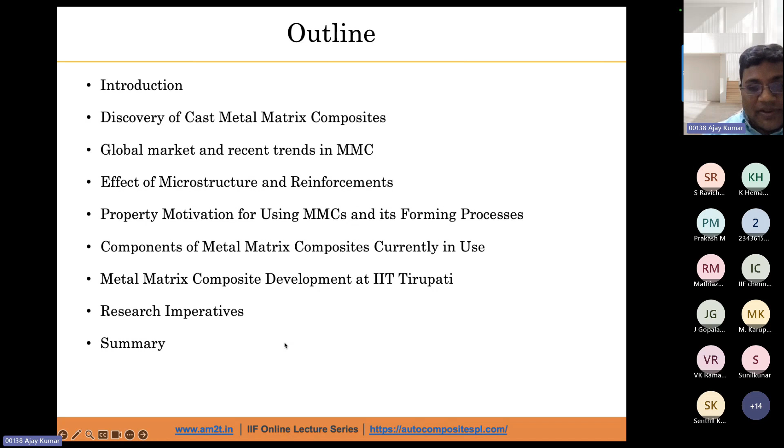The discovery of the first cast MMC, metal matrix composites, happened in 1969, where Professor Pradeep Rohatgi, whom I worked with for almost 3 years, developed the dispersion of graphite particles in the aluminum metal matrix through injection into the melt. This process he developed at MIT, USA.

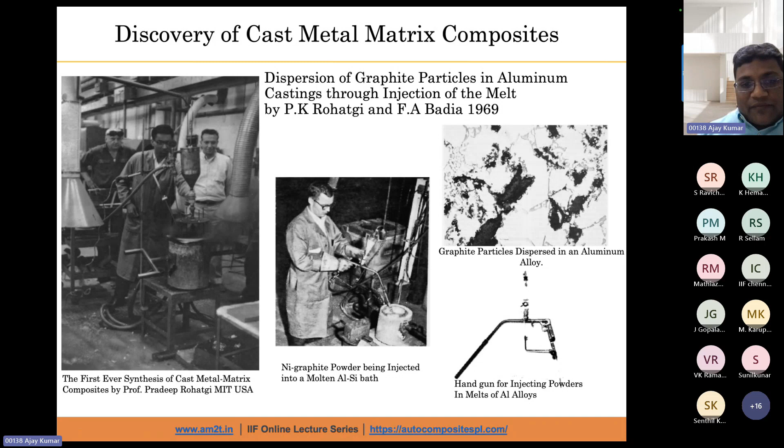You can see here he used a very simple setup for mixing aluminium reinforced with graphite reinforcements, and he got a very beautiful microstructure. You can see the graphite particles embedded in the aluminium alloy. This was the first time Professor Pradeep Rohatgi and Professor Badia at MIT USA developed this material and process. Since then the journey started, and this MMC field has progressed a lot, with many people working on developing different metal matrix composites for various applications.

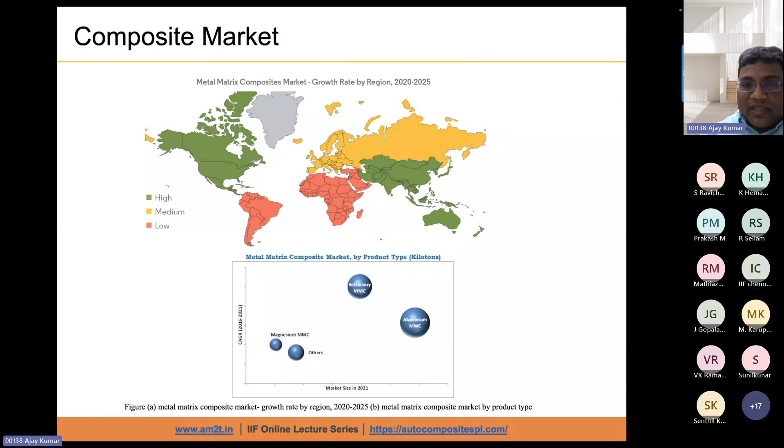When we see the global market of composite materials, most of us are aware of the composite materials of various categories. Here I am talking about metal matrix composites. India is also one of the leaders in developing metal matrix composites. Several institutions in India, especially CSIR labs like CSIR Trivandrum, CSIR Bhopal, and several IIT faculties also started working in this area, and now they have developed a lot of components using metal matrix composites.

Now, why metal matrix composites? We need to understand this because they have high strength to weight ratio, very high thermal stability, low coefficient of thermal expansion, and high wear resistance. Because of these features, we are interested in developing these metal matrix composites for various applications.

We also need to understand the controlling parameters when we develop these metal matrix composites. When we develop them, we have two different phases: the metallic material as a matrix material, and the secondary phase, which can be a polymer or ceramic phase, that works as a reinforcement in the metal matrix. Based on the reinforcement and the matrix, we name the composite materials.

If it is a fiber as a reinforcement, we say it is a fiber reinforced composite. If it is a particle as a reinforcement, we say it is a particle reinforced composite. If the matrix material is a metal, we say it is a metal matrix composite. If it is ceramic, we say it is a ceramic matrix composite. That is how we name the material, and the controlling parameters also decide the properties of the material.

We have the dispersoid of different size, shape, content, and distribution. These are the four parameters which play a very important role in MMCs.

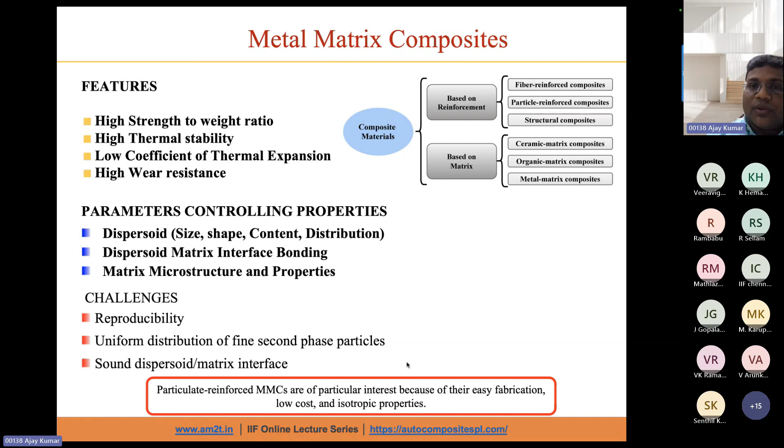Their journey started in 1969. Since then, continuous fiber composites have also been used in the Space Shuttle and Hubble Space Telescope. After that, particle reinforced composites were developed, where people used SiC whiskers and SiC particles in electronic racks, cross beams, and ultrasonic inspections. New reinforcements like alumina have also been used in helicopter bearing liners, along with nanoparticles of different ceramic materials as reinforcement.

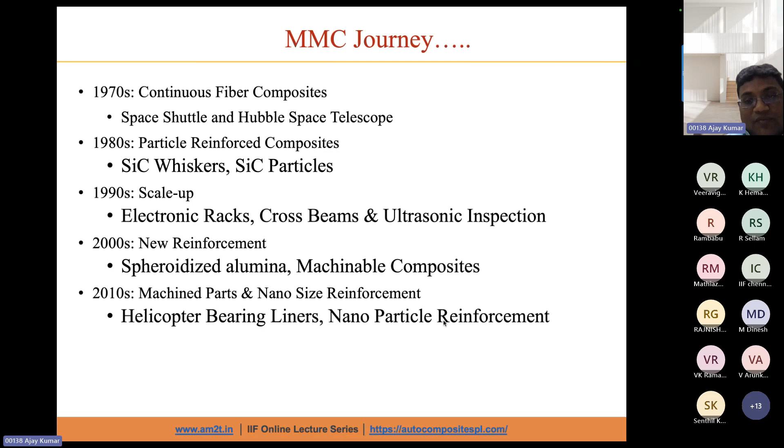So when I talk about metal matrix composites, we have different categories of MMCs based on the reinforcement phase and the matrix phase, and different sizes of reinforcements varying from 1 mm to 50 nanometers. We also consider the volume fraction of these second phase materials in the matrix, and the different properties they can attribute to the composites.

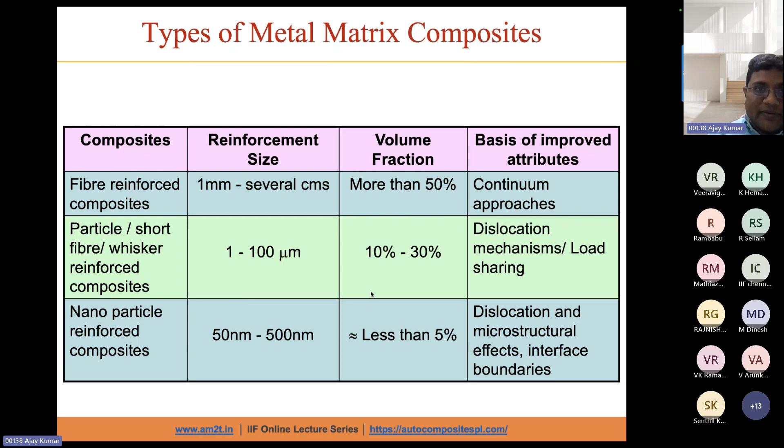This is how different types of metal matrix composites are classified. These are the different microstructures - you can clearly see the classification based on the size, arrangement, and shape of the reinforcement. These are the actual microstructures of aluminum silicon alloy and ductile cast iron. You can see the different needle-shaped reinforcements, and then the different irregular shapes of particles depending on size and arrangement.

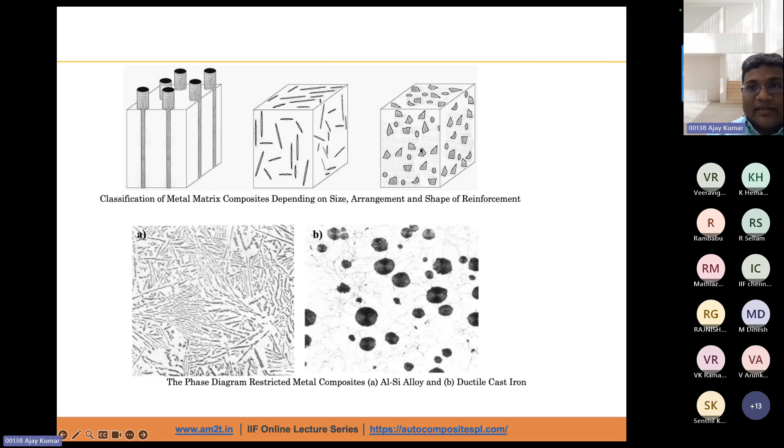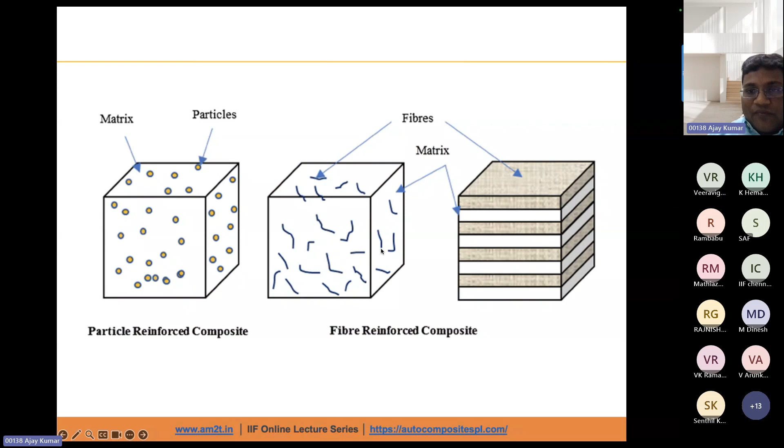Depending on the size, arrangement, and shape of the reinforcement, we can decide the properties of the materials. The reinforcement particles can be in the form of spheres, fibers, and we can also have laminates. This is how we decide the different categories of metal matrix composites.

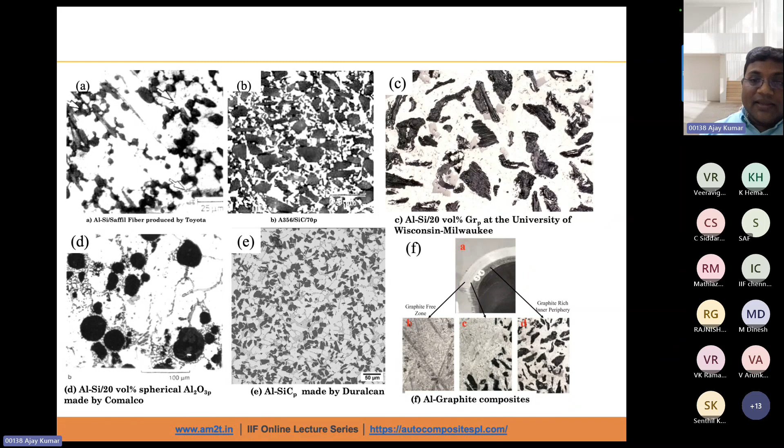These composite materials can be used for tribological applications where you need less friction and more wear resistance.

Now, when we understand the metal matrix composites and the different reinforcement and matrix phases, we need to know the different manufacturing processes used to develop these MMCs. We have three different types of processes. One is vapor deposition - chemical vapor deposition and physical vapor deposition. These are different manufacturing processes, each with their pros and cons, but these processes are very expensive and also have limitations in size and shape.

Then we have liquid state processing, where all casting processes come under this category. Casting, as you know, is the cheapest and most widely used by industries, easy to use in industry, but there are some challenges - undesirable reactions we cannot avoid, and the large quantity of reinforcement is also a problem when we embed large amounts of reinforcement in the metal matrix. I will show you some slides on how to address these problems.

The third one is solid state processing, where powder metallurgy is one route, and another solid state process, which is a recent trend, is additive manufacturing, where friction stir additive manufacturing is being used or modified as a technique to develop these MMCs.

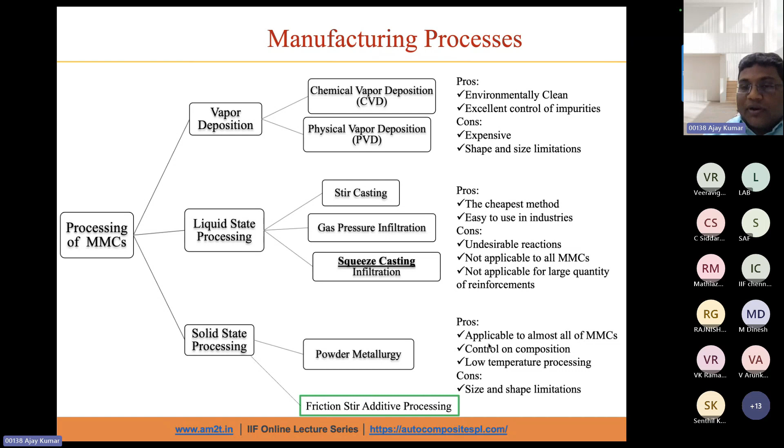Now, most of you are aware of the different types of strengthening mechanisms, since all of you will be from a metallurgical or materials background. We have different types of strengthening mechanisms for how we can strengthen the material. The first strengthening mechanism is grain refinement strengthening, where we try to refine the grain size of the matrix material, using the Hall-Petch equation.

Then we have Orowan strengthening - you can see dislocation loops. Dislocation density increases, and this also contributes to increasing the strength of the material, along with the coefficient of thermal expansion mismatch and load transfer.

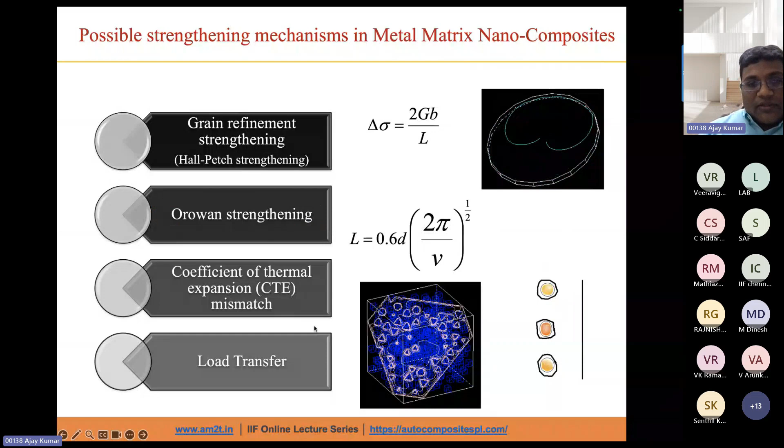So there are different strengthening mechanisms from the fundamental perspective we use to explain metal matrix composite strengthening. Now, as I mentioned, we have several advantages of developing these MMCs. The first advantage is we can use these MMCs at room and high temperature with high stiffness. They also have excellent strength-to-density and stiffness-to-density values, improved fatigue resistance, and improved creep resistance. Fatigue and creep are very important properties for high temperature applications, as well as where we have cyclic loading, so this we need to understand.

The bonding between the matrix and the reinforcement, as well as the size of the reinforcement, plays a very important role when we talk about fatigue and creep properties for MMCs for different applications. Also, we get isotropic properties because we are talking about uniform dispersion of the second phase particles, and then it can be riveted, brazed, welded, and plated.

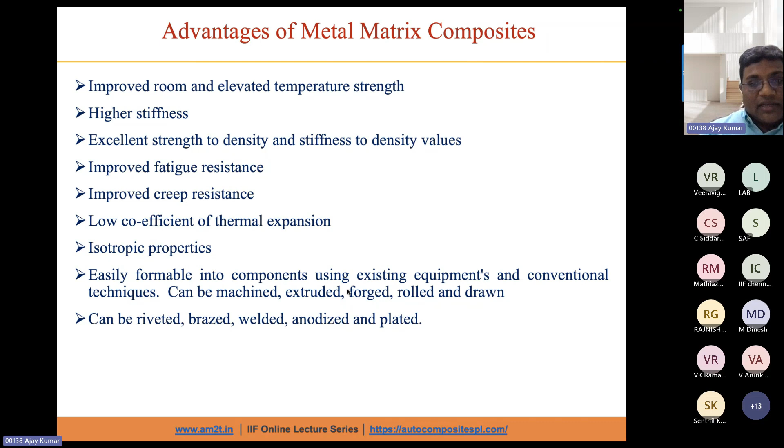So there are different advantages we have for the MMCs. Now let us understand the cost also.

When we talk about cost, as I mentioned, we have different types of reinforcement phases. We use the particulate phase, which is low cost. If we use continuous fiber whiskers, it will add some cost, and fibers will also add some cost. Then there is diffusion bonding, powder metallurgy, and liquid metal. So there are three different routes or concepts we are going to use.

We have to understand the cost when we use particulate as reinforcement with liquid metal as a processing route. The cost is going to be very low and it's an economical process. That is why I am talking about cast metal matrix composites, where we can provide isotropic properties to the material, using the casting process as a manufacturing process, which is acceptable by most industries as well as being economical.

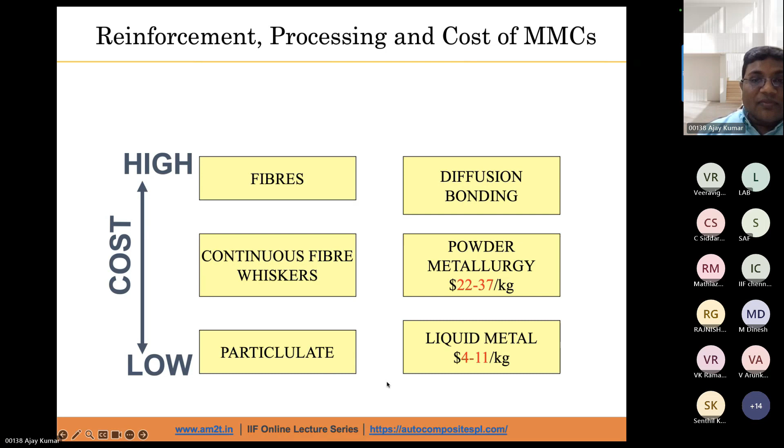Now let us discuss some fundamentals of the casting process, when we melt the material and solidify it. We get a microstructure with grain boundaries, and we use second phase particles. Either these second phase particles will sit on the grain boundaries, or they will be inside the grains - intragranular or intergranular - depending on the manufacturing process.

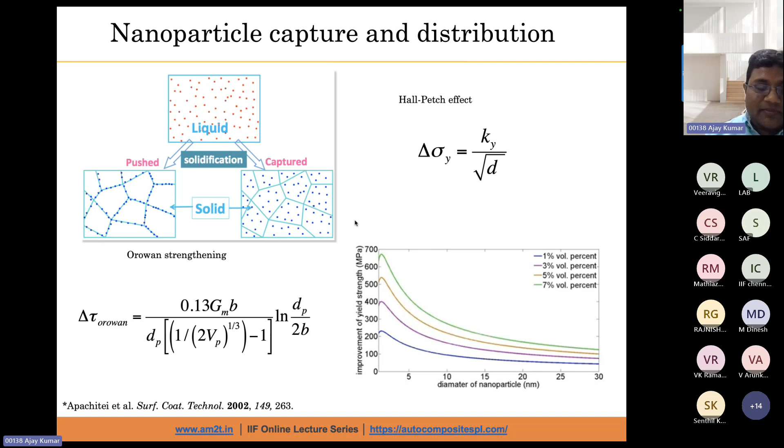If we are able to refine the grains during this manufacturing process, then the strength of the MMC will also increase, and the grain size can also be controlled in various ways. So we can use the grain boundary strengthening mechanism and Orowan strengthening mechanism to explain the MMC strengthening, and then we can also use nanoparticles.

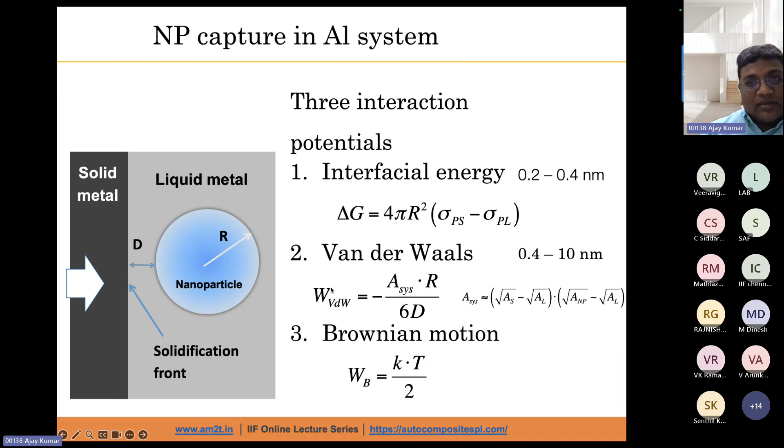When we use different types of particles, we embed the particles in the matrix, but we face a lot of challenges during the mixing, because these particles generally agglomerate during mixing. We have to carefully understand how we can mix these particles, because they have very high energy interface surface area. So we have to control the distribution carefully so that we can get uniform dispersion when using micro size or nano size particles.

Now we are talking about the manufacturing process of the MMCs. I am introducing the in-situ MMC process. There can be ex-situ process also, but if we can use in-situ process, where we control the parameters and properties during the process itself, that will provide good properties for the MMCs.

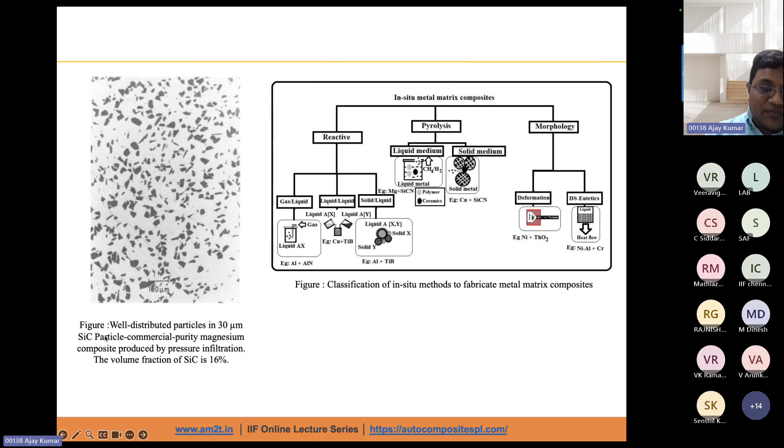And you can see here this microstructure shows the well-distributed particles, 30 micron size SiC in magnesium, and here we have used the pressure infiltration process. So I'm going to show you this process.

Now what are the challenges and scientific issues when we make cast MMCs for different applications? The first challenge is transfer of reinforcement into the melt, then movement of reinforcement in the melt, effect of reinforcement on viscosity and fluidity of melts, and hot tearing effect.

Effect of reinforcement on nucleation, growth, and microsegregation in the solidifying matrix. And then when we mix the reinforcement particles, we also see engulfment or pushing of the reinforcement by the solidifying interface, and the distribution, bonding, and volume fraction effects on the physical and mechanical properties of cast MMCs.

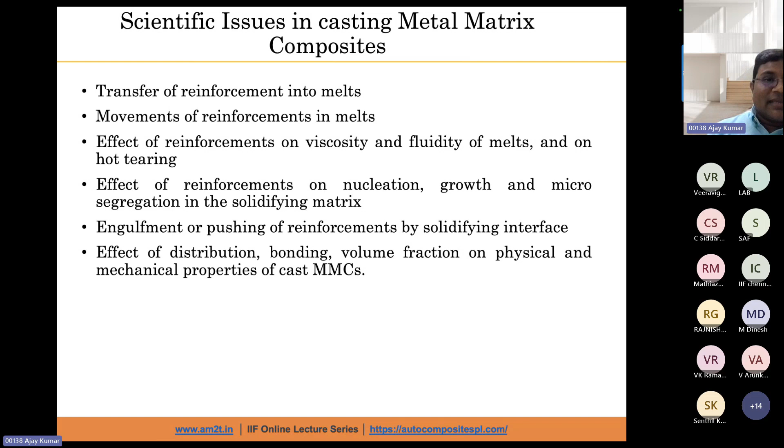So these are the scientific issues which people have already addressed, some of them. And when we are talking about recent trends, some of the issues are already addressed, but still some issues still exist, which need to be addressed through future research.

So here we are talking about the specific stiffness and specific strength of these materials. In this aspect also, these MMCs show very good performance.

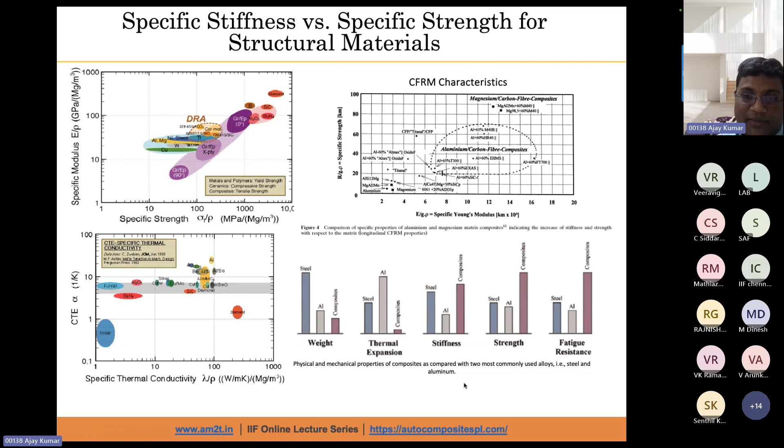Now, as I mentioned, we can use different types of casting processes. So here I am giving a couple of examples of the casting process.

One casting process introduced long time back is the stir casting, where we can mix the reinforcement particles in the metal matrix using a mechanical stirrer to avoid agglomeration. We can also use ultrasonic vibration methods to avoid agglomeration, so that these reinforcement particles can be mixed uniformly in the metal matrix.

This is the old picture where we used our regular furnaces, but now we have improved a lot on our equipment. Now we have dedicated stir casting machines in our lab where we can control the mixing, control the process parameters, and avoid defects in the MMC.

Another process is the infiltration process. Basically, we infiltrate the second phase particles through the liquid metal, and this provides a lot of advantages. We can control the distribution of the second phase particles, and also control the defects in the infiltration process.

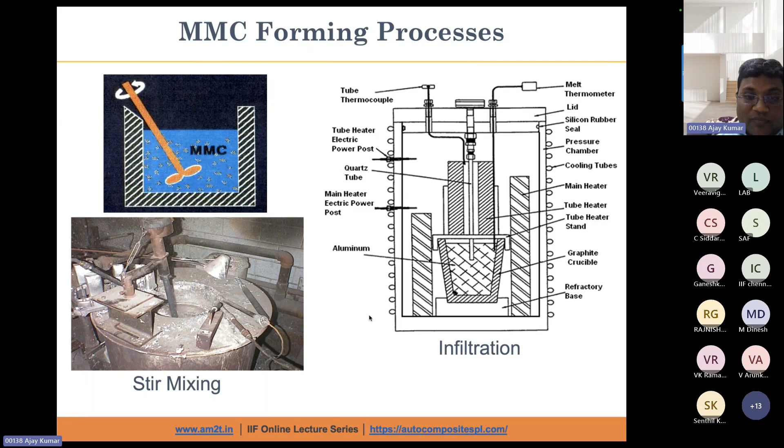This infiltration process can also be used for several applications. One application is MMC. Second, we can also develop metallic foam or composite foam, lightweight composite foam. I will also show you some examples of how we can use this process.

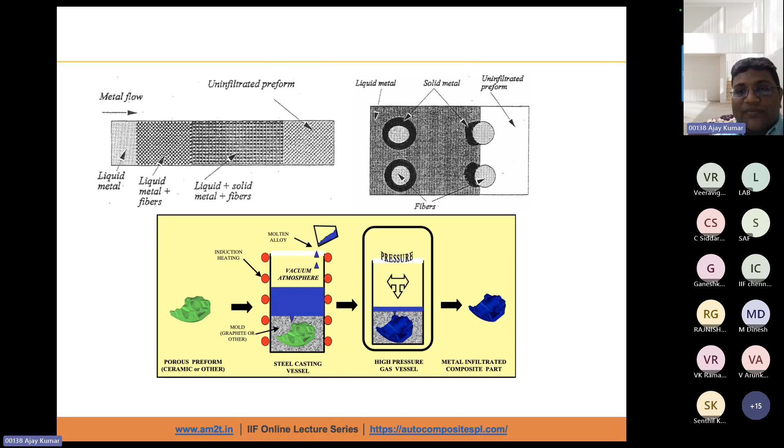When we talk about pressure infiltration, you can see here we have the preform material and the liquid metal. We make the preform, and from here the particles infiltrate through the liquid metal. So we have the liquid metal here, then the solid metal, and the uninfiltrated preform. This is how the process helps, and the particles infiltrate through the liquid metal, giving us a fine distribution of the second phase particles in the metal matrix.

Now this is the example of graphite fiber aluminum composite material, which has been used for the Hubble Space Telescope. Here they used 6061 aluminum alloy and graphite as the reinforcement material.

But the main challenge when we use graphite as a reinforcement is that we have to take care of the surface wettability of the graphite or carbon material with the metal. So they use different types of treatments on these graphite materials before reinforcing them in the metal matrix, so that the interface will be bonded properly and the distribution of the graphite particles in the matrix will be uniform.

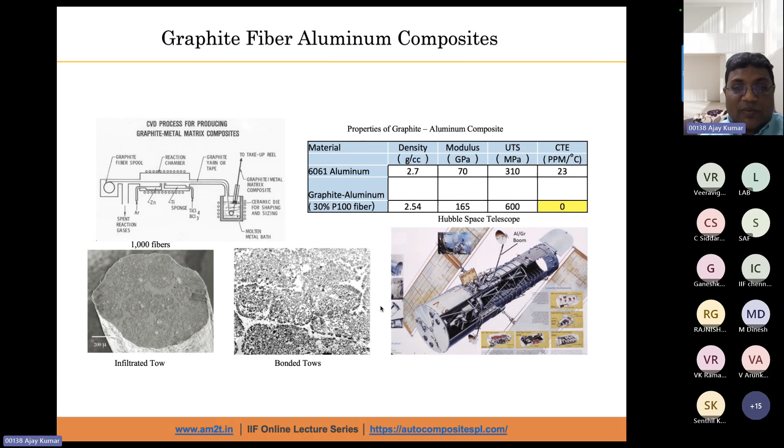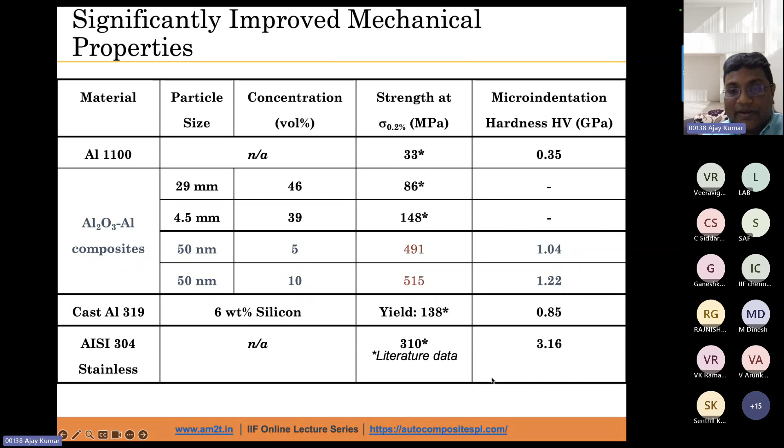You can see here significant improvement in the properties of aluminum matrix composites, where they used alumina and aluminum, and also aluminum 319 alloy. You can see the properties, and concentration-wise also how much reinforcement they have done, and the strength of the composite materials has increased significantly. This is how it goes.

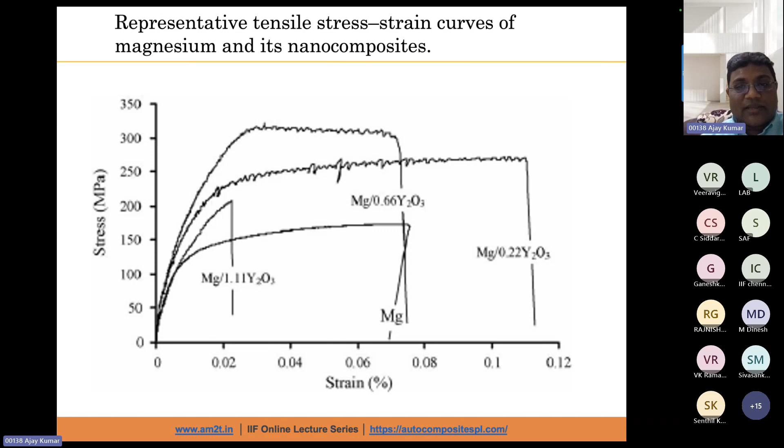But I'm going to give you examples where we can also increase the strength as well as the toughness of the composite materials. Here in these slides you can see the literature work, the research work people have reported in different combinations of materials, matrix and reinforcement.

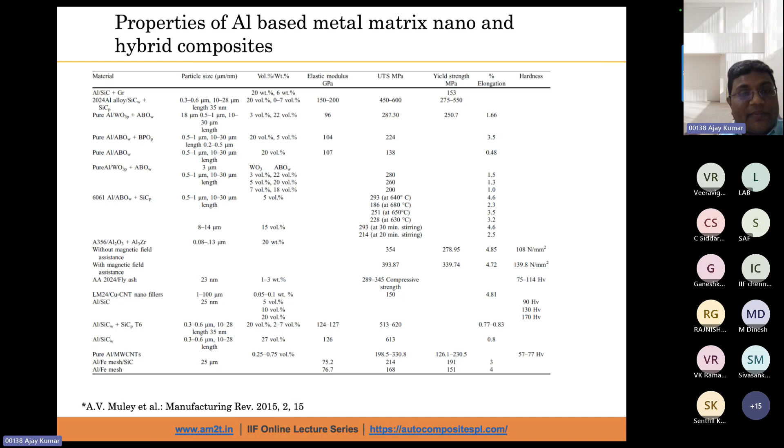You can see the UTS, ultimate tensile values, and yield strength values also increasing, along with the percentage elongation. So most of the things we will face problem with is the ductility. Ductility of the cast metal matrix will decrease because of the dispersion, and sometimes the interface between the matrix will not be bonded properly. That is why we face a reduced ductility problem in the cast MMC, but we can get good strength.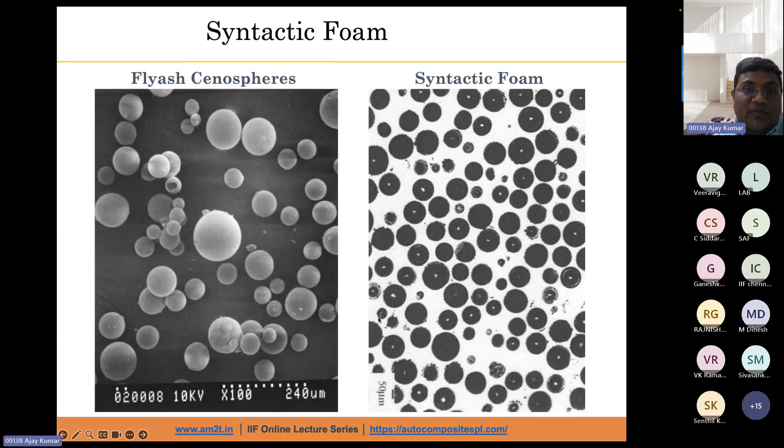Now we can also make syntactic foams. As I mentioned, with pressure infiltration we can use fly ash cenospheres as a reinforcement. A lot of work has been reported in this area, even from India. Some labs like CSIR Trivandrum lab, CSIR AMPRI, and other IITs have reported this type of work. They have used fly ash cenospheres as a reinforcement material and made syntactic foams for various applications. They are lightweight and have very good damping properties.

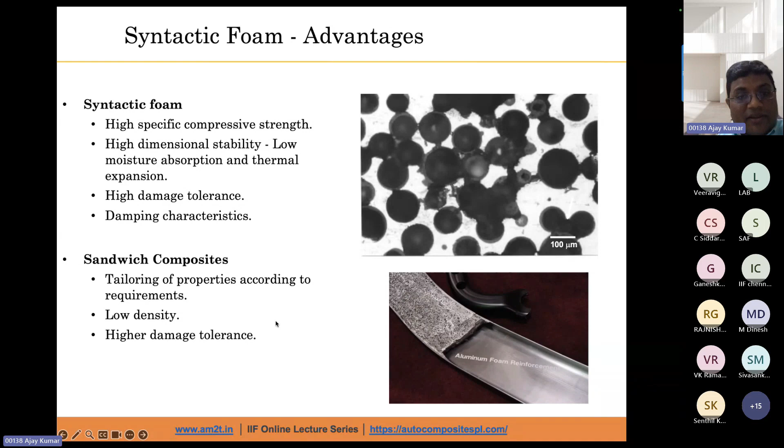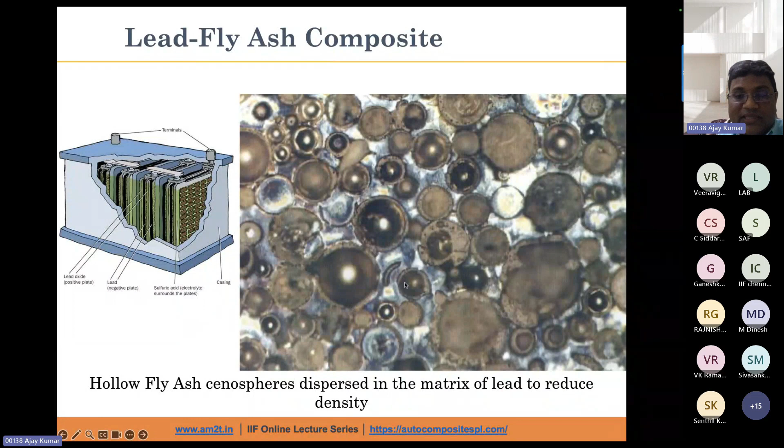Another recent trend in the area of MMC is happening because a lot of work has been reported in particle reinforcement composites, especially in aluminum matrix, aluminum alloy, magnesium alloy, and copper alloys. Now the recent trend is going into the area of self-healing and shape recovery cast metal matrix composites. This concept will help a lot, especially in crucial applications or even civil and military vehicle applications.

If any crack nucleates during the operation of any component, once it nucleates it propagates very fast. So we have to see if we can stop the propagation, if not 100%, at least to some extent. That is how the self-healing and self-shape recovery concept will help.

We try to reinforce shape memory alloys or shape memory materials in the metal matrix, and we see if any crack develops, can we heal it? If not 100%, at least 60 to 80%. If we are able to heal the crack, we can save a lot of lives or prevent accidents.

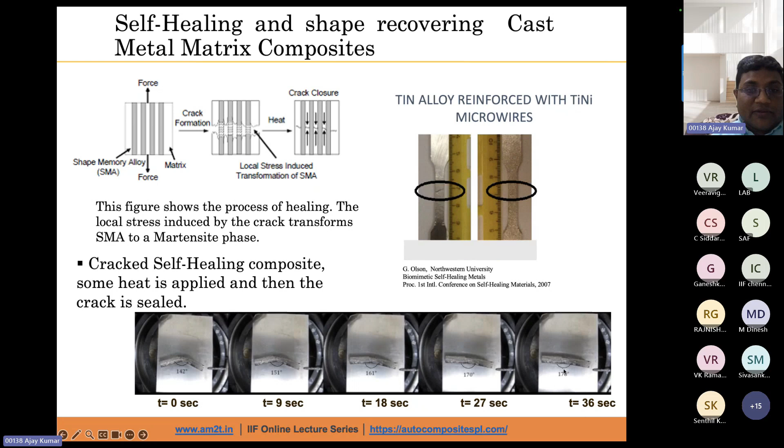So we conducted a very preliminary experiment where we inserted shape memory wires and then introduced cracks, and we have seen that this can be healed. You can see here the defected or cracked sample, and over a period of 36 seconds it has healed a lot. This is how we are introducing self-healing MMCs.

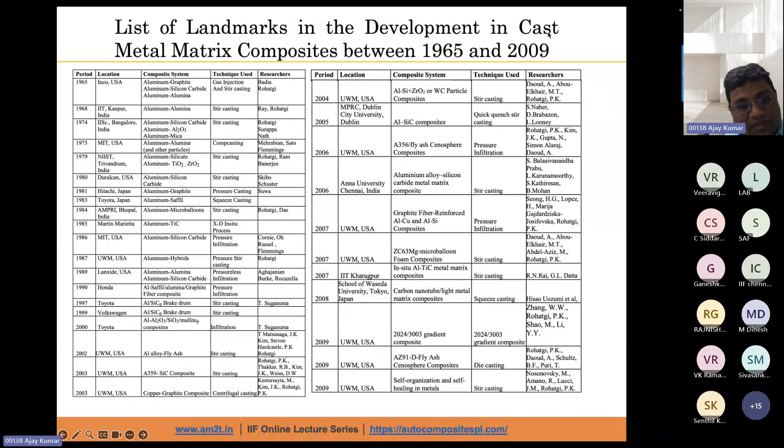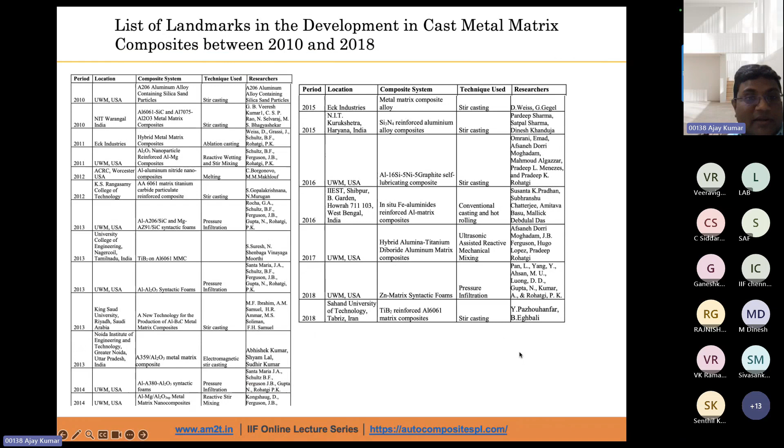This slide is just for your information: the literature work started in 1965, where aluminum graphite composites were started by Professor Rohatgi and Professor Badia. Since then, a lot of groups from abroad and from India have contributed a lot in this domain. This is the literature work; if you are interested, I can provide you this information.

In India, I see very few companies or industries entering into this MMC business. But just to give you the information, these top automotive companies are already making composites or components using the MMC process, using casting. Some companies use squeeze casting infiltration, others use stir casting or other casting processes. So they are making brake rotors, pistons, connecting rods, and cylinders.

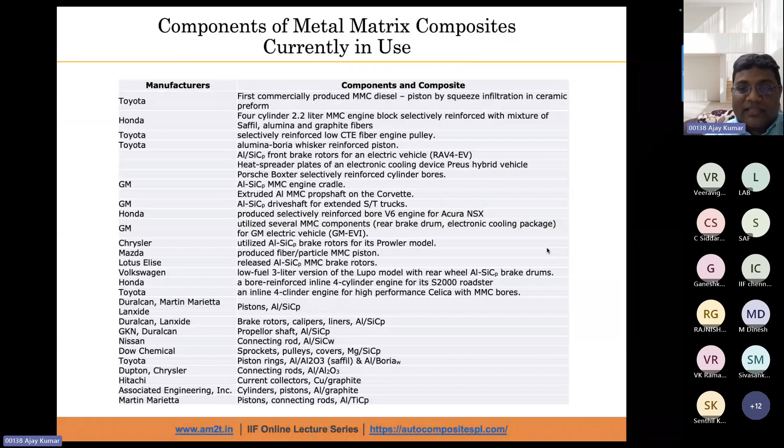The brake rotors are made of aluminum silicon carbide composites. You can see from this slide that already a lot of good top companies and industries are there in the MMC business. So there is a need that some of the foundry industries may also be interested to develop these composite materials in future. There is a lot of scope in this area.

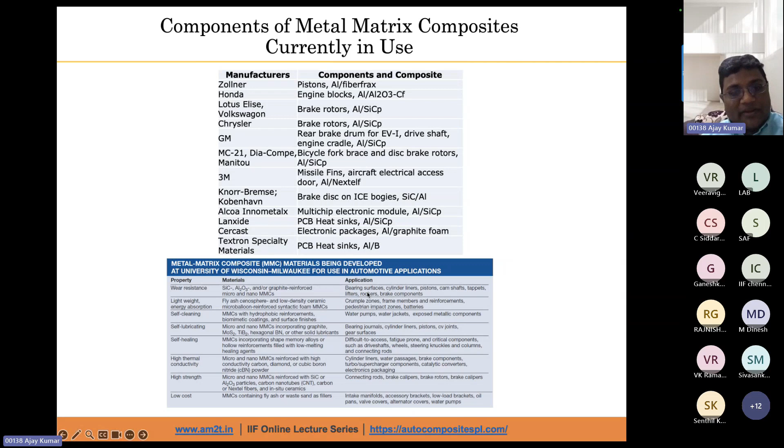Now, what properties do we need for different applications? We have a lot of data available. If we need high wear resistance, what reinforcement phase can we use, and what are the different components, basically cylinder liners, pistons, camshafts, and brake components. We have a lot of data available nowadays to implement or use these things for different applications.

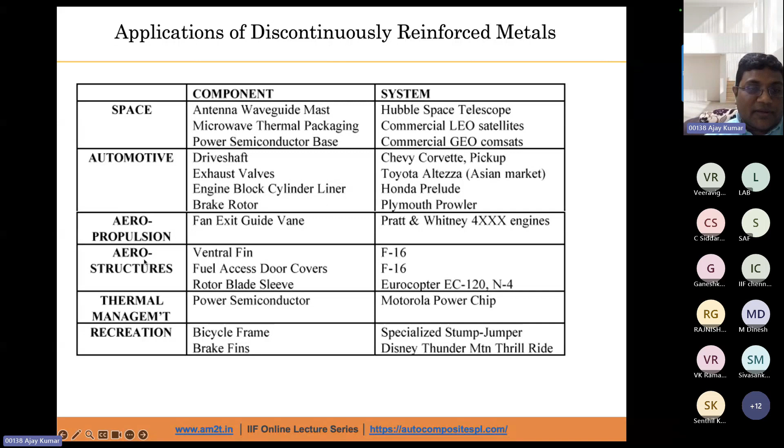So we have different applications of discontinuously reinforced metals also. For space applications, some composite materials are already in the Hubble Space Telescope. For automotive, some companies are already using these composite materials in brake rotors, exhaust valves, block cylinder liner components, and also in other aero applications as well as thermal management.

So these are some of the slides. We have also published this work before, along with several institutions.

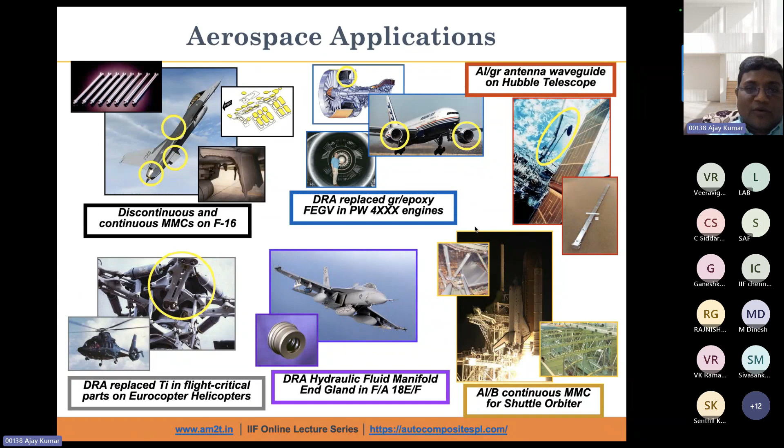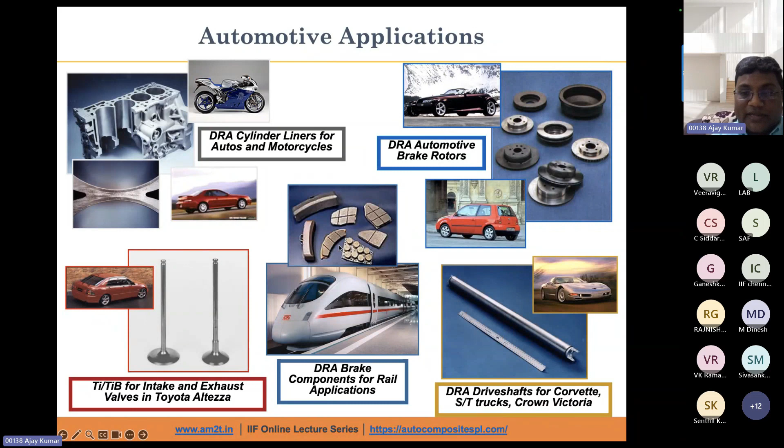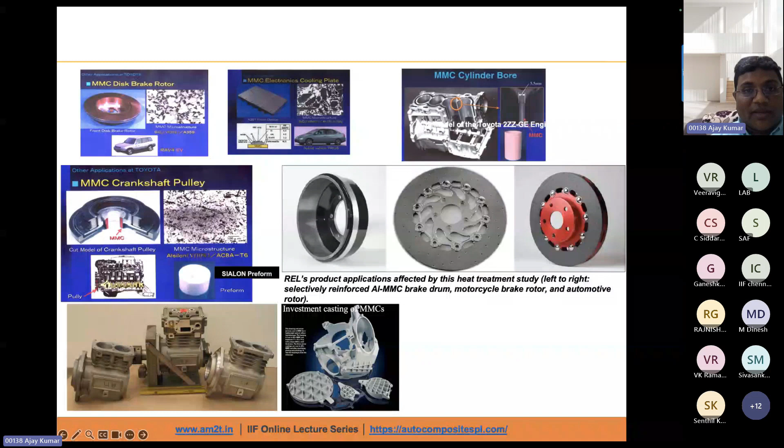Aerospace applications, we have these MMC materials. Automotive applications - you can see here different applications for brake rotors, autos, motorcycles. MMC are being used in these applications. So these are the applications for MMC disc brake rotors. Here the electronics cooling plate also we can make, and also other applications.

This is the components being manufactured using the aluminum silicon carbide, graphite composites. Even in India, CSIR Trivandrum lab, Dr. Rajan is there - he has contributed a lot in this area, and he has developed several components using the MMC process.

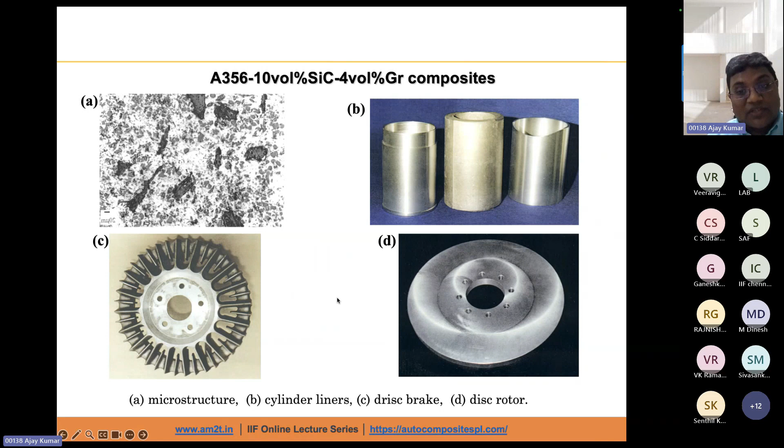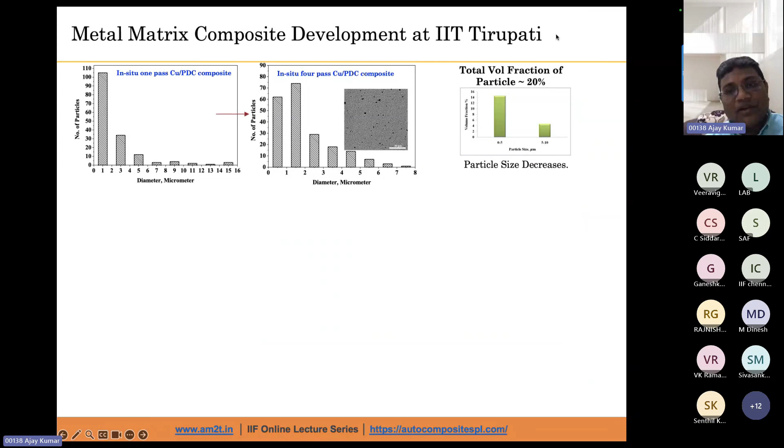So these are some of the things. Now I will discuss about the work which we are doing at IIT Tirupati and some of the work we have reported. As I mentioned, when we make composite materials using casting process, casting is the most versatile process, and it is the acceptable process by most industries. We can make various components of large scale, but a couple of fundamental challenges we are going to face in cast MMC is the low toughness and the uniform dispersion of the second phase particles.

So this is where we have used the solid state processing. We have combined liquid state route as well as solid state process route, so that now we can get better properties, and also address all the challenges which we are facing in cast MMCs. So here we have introduced the friction based process, where we have used the cast MMC plate, and we have done friction stir processing on the cast MMCs to eliminate all the casting defects and get fine distribution of the second phase particles.

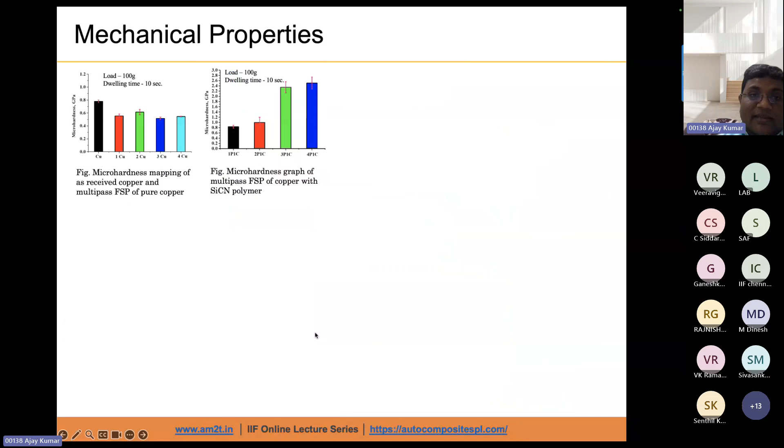So we are combining the casting process - basically it is a hybrid process we can use, and we can get very good properties where we get high strength as well as high toughness of the composite material. That is how we address the challenges. Individual processes may not help sometimes, but if we come up with a hybrid approach, we can address a lot of challenges. So here we have developed copper based composite materials.

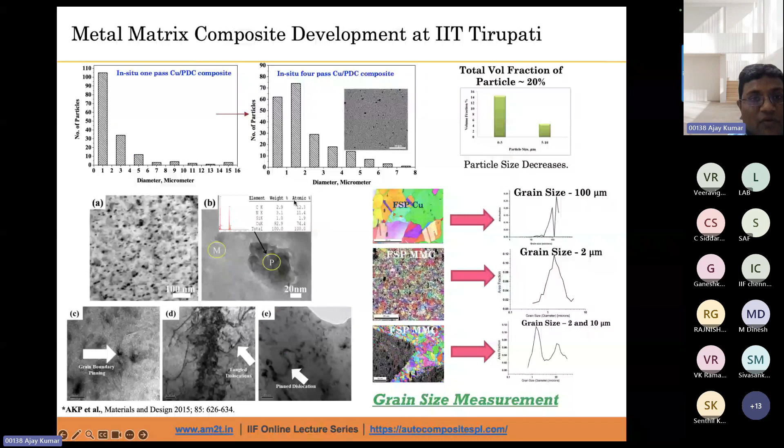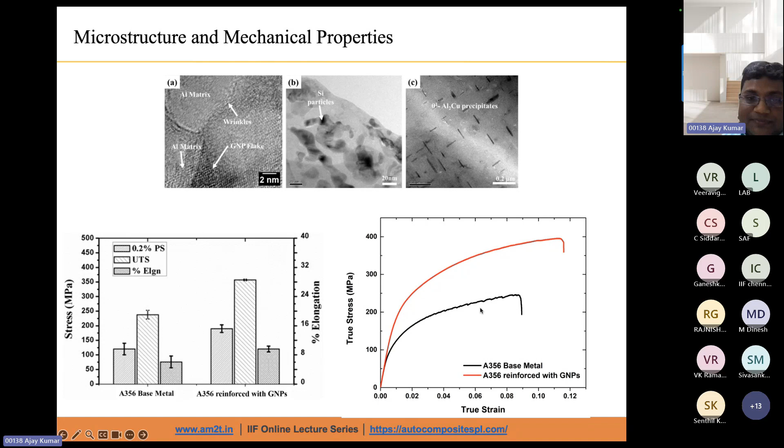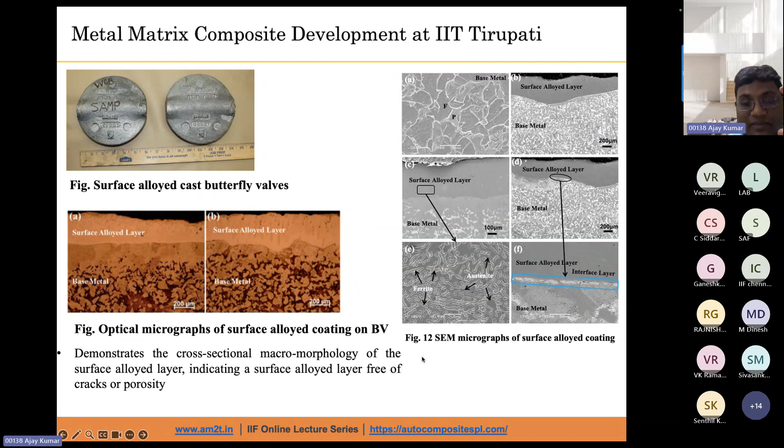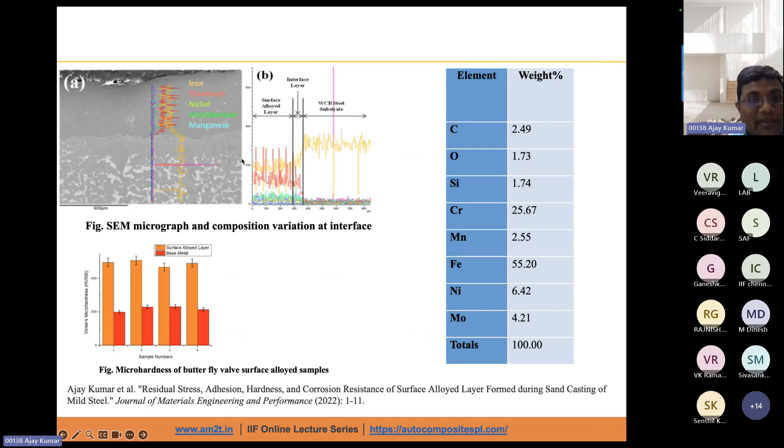So you can see here the surface alloyed layer. This is all developed during the manufacturing process, and this surface alloyed composite has given very good corrosion resistance results, as well as mechanical properties. You can see the hardness has also increased, as well as the thickness of the surface alloyed composite layer. So here we have nickel, chromium, and other elements embedded - we have reinforced with the matrix material.

Now, as all of you are aware, today everyone is focusing on one or the other type of additive manufacturing process.

Additive manufacturing process, if you see from the fundamental perspective, is the casting process. It is the localized casting process where you use one heat source, and then filler material in the form of powder or wire, where you melt the material and keep depositing layer by layer. So it's a controlled localized casting process, and you can see the microstructure of any additive manufacturing component is similar to casting microstructure, with lots of columnar grains, dendritic grains, and other defects which we come across in the casting process.

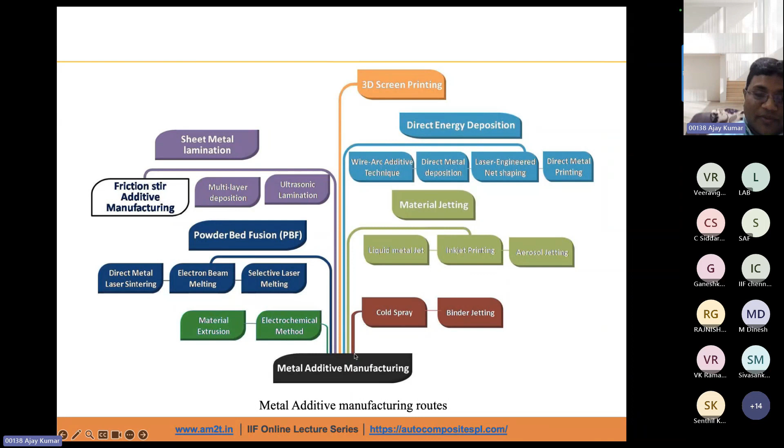Surface finish is also one of the very challenging issues in the additive manufacturing process. So additive manufacturing is a localized casting process from the fundamental perspective, where everyone is now interested to work. We have also done a lot of work here.

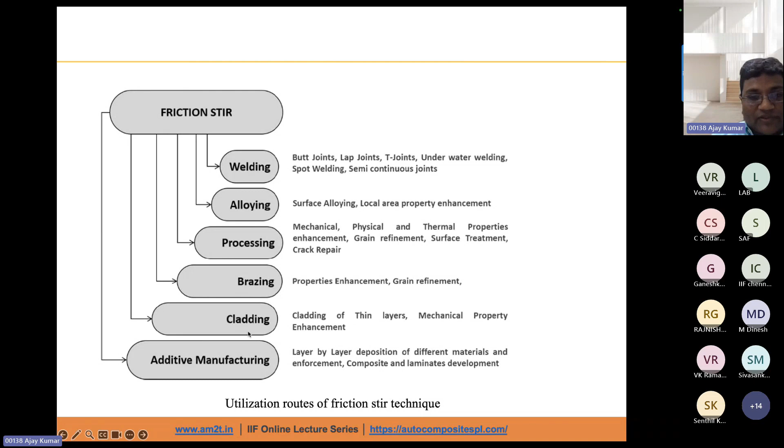Now we are also proposing a hybrid approach, how we can make composite materials using this process. Friction stir is one such approach. This can be used for welding, alloying, processing, cladding, and additive manufacturing. This is the approach where we use a rotating tool which is embedded inside the material.

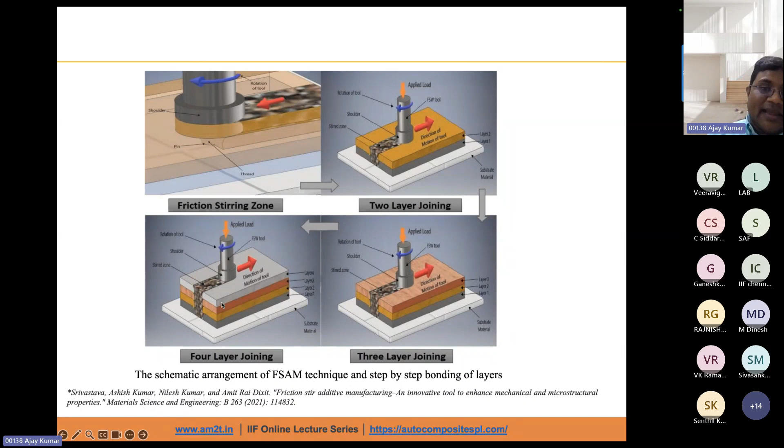Then we try to do the additive manufacturing in the solid state itself. Either we can use cast composite plates and use this process, or we can make additive layers using this process through frictional heat. There is no melting here, it is a direct deposition. So we can use different types of approaches here.

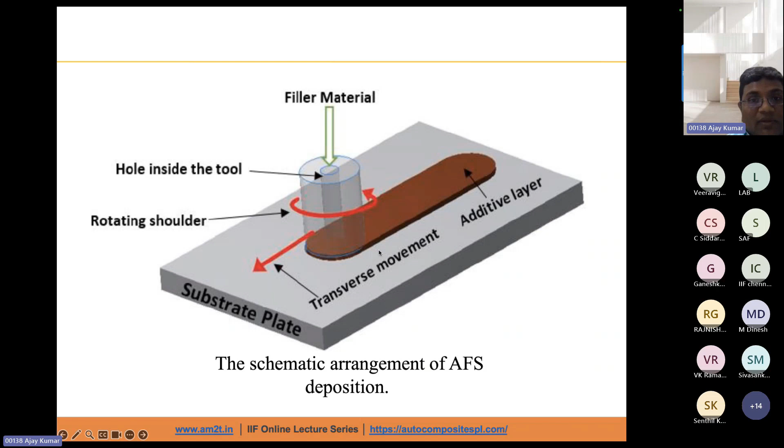Either we can use the filler material, and the tool will rotate and keep depositing, or you can have powder material on the bed, and use frictional heat to develop additive layers for making different types of composites. Even functionally gradient composites also we can make using this approach. So you can see here these are different types of layer by layer deposition.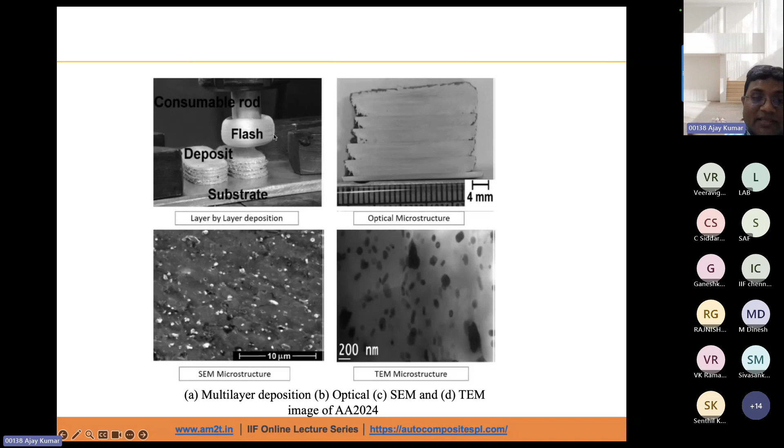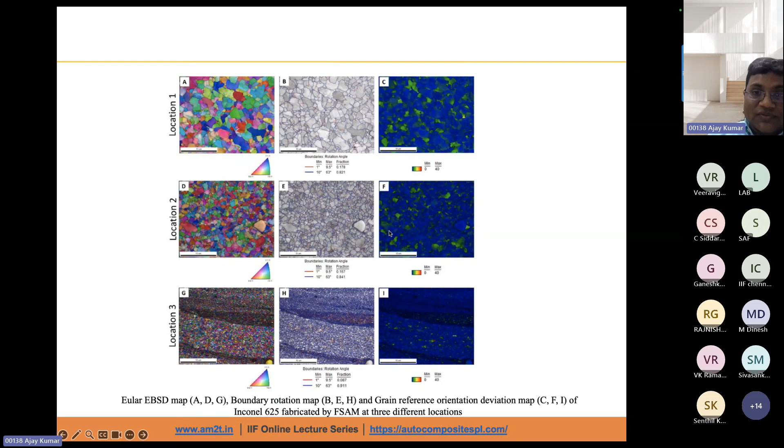And now the latest trend in the area of structural health monitoring. We have to overcome or come up with health monitoring in the material system. Every industry is interested in how we can monitor the health of the component during the process and during operation itself. So here we are introducing a lot of structural health monitoring concepts, also IoT concepts, AI, ML concepts, how we can monitor the health and address the challenges.

I also have mentioned structural self-healing, self-repairing materials, and structural health monitoring is another concept which should be used in all material systems. If we can monitor the crack, we can also heal the crack, then the life of the component will increase, and that will save a lot of cost in terms of lives and money, and we can contribute a lot in this area.

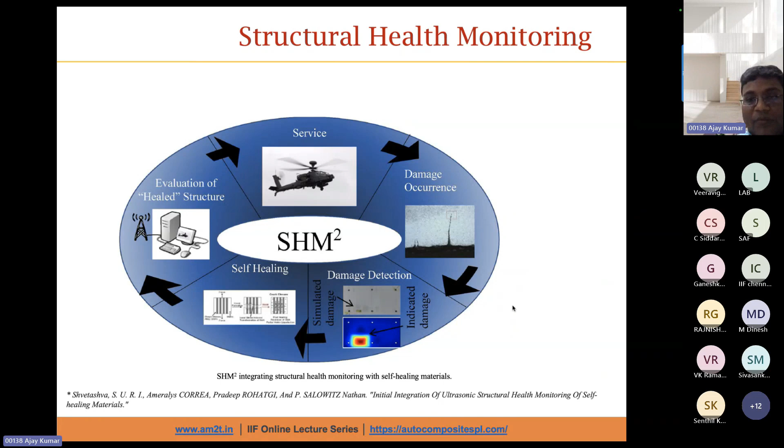Now I would like to give you the different research imperatives which we have also published and compiled here. The first imperative is to prevent agglomeration and clustering of micro and nano sized reinforcement during synthesis and casting of MMCs. This will be an issue if we don't follow the correct approach.

Reducing the cost of MMC—as I mentioned, if we use the hybrid approach we can reduce the cost of MMC as well as address all the challenges we face. Reducing difficulty in machining also we can address. Developing property data: a tremendous amount of research has been done in the area of cast MMCs, but there is still a lack of database. An organized database is not available anywhere, so that has to be done. We are taking some initiatives to develop the database in our lab.

So maybe in a couple of years' time we would like to come up with a very good database where anyone can come and use that database for MMC components, developing supplier base and capability to cast large numbers of cast MMCs for the foundry industries. I have also shown you a slide where top automotive companies are using MMCs, but in India, industries are still hesitant to use these MMCs in different applications. If any of you are interested, we can work together in this area and use different foundry approaches for developing these MMCs for various applications.

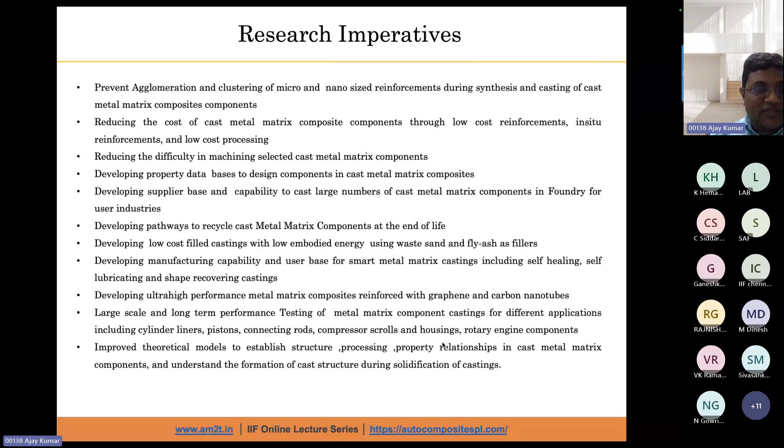So what I would like to say is there is still a lot of scope to develop new MMCs, addressing all the challenges, and to come up with a hybrid approach for developing metal matrix components for different applications by industries—foundry industries and others.

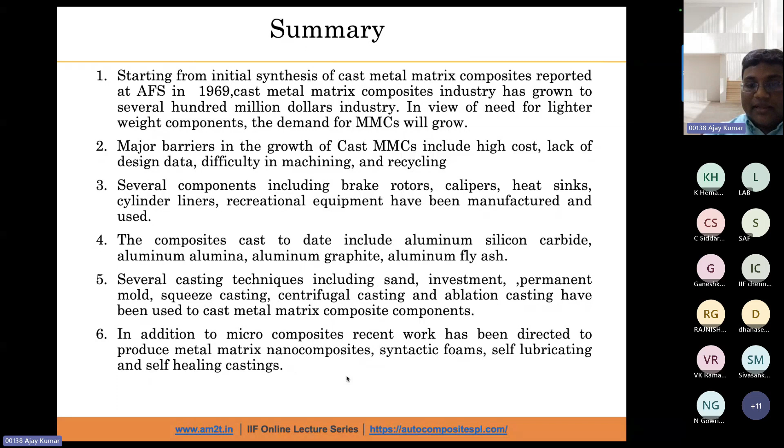So here I would like to summarize. We have reported this entire data in various conferences and platforms. The barriers in the growth of cast MMCs include high cost and lack of design data, which still needs to be addressed. Several components, including brake rotors, calipers, and heat sinks, are already in application by different companies and industries. Several casting techniques, including sand casting, investment casting, permanent mold casting, squeeze casting, and centrifugal casting, have been used to cast MMC components. Micro composites are recent work, and now we are also talking about nano composites, graphene and carbon nanotube reinforced composites for different applications, and self-healing and self-repairing MMCs. This is how I summarize my talk, and I thank you for your kind attention. I would like to thank IIF again for giving me this opportunity.

Now I am available for your questions and will address them if possible. Participants, any questions from your side?